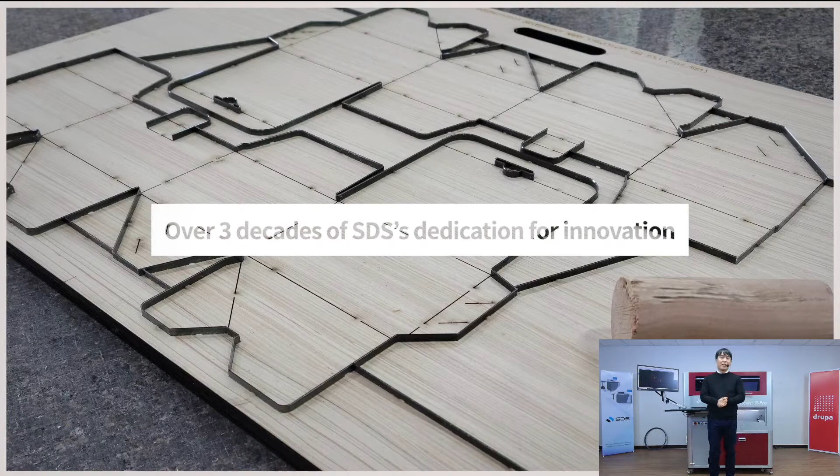SDS was founded in 1988 as a die shop and has since developed into a global company in the industry with numerous innovative products of fully automated processing and bending steel rule machines. Thousands of EasyBender and Channel Bender series sold in the US, Europe, and around the globe have proven that SDS is a leader and innovator since its foundation.

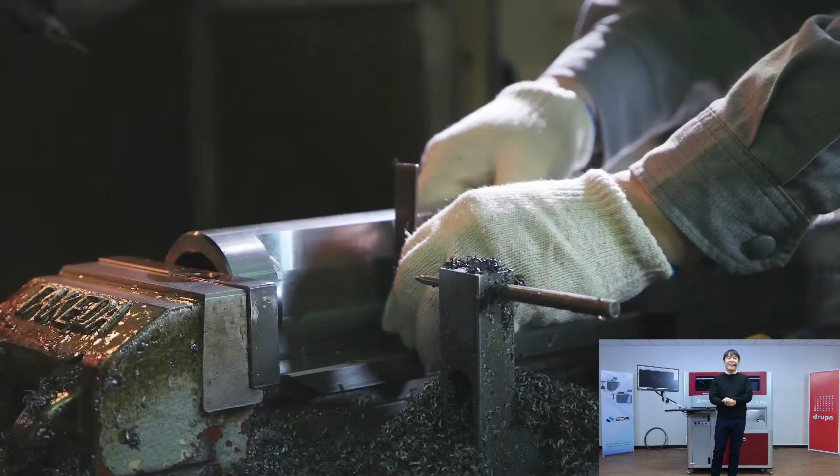A countless number of patented products and newly added in-house manufacturing capabilities, as well as distributors and dealers for sales and tech support all around the world, is just another way of promising to our current and future customers that SDS continues to strive for easier and better products.

Many of you out there might know that SDS made the first fully automatic curved steel rule bending machine in 2003, the EasyBender XR. We now call it EasyBender R, and have sold hundreds of them around the world. We initially believed that EasyBender R is enough for the market. Competition comes in, and we later realized that the market needs a reliable and affordable solution. So I am extremely excited to take this opportunity to introduce one of our latest EasyBender series, EasyBender R Pro, our answer to rotary die making.

EasyBender R Pro, what we have here, is capable of processing and bending 4-point notched and no notch curved rule up to 32 millimeters, from 257 all the way up to 695, the jumbo steel rule dies. One of the advantages of EasyBender R Pro over our competitors is that it is designed to change over different diameters of steel rules with a few clicks of the bending machine software.

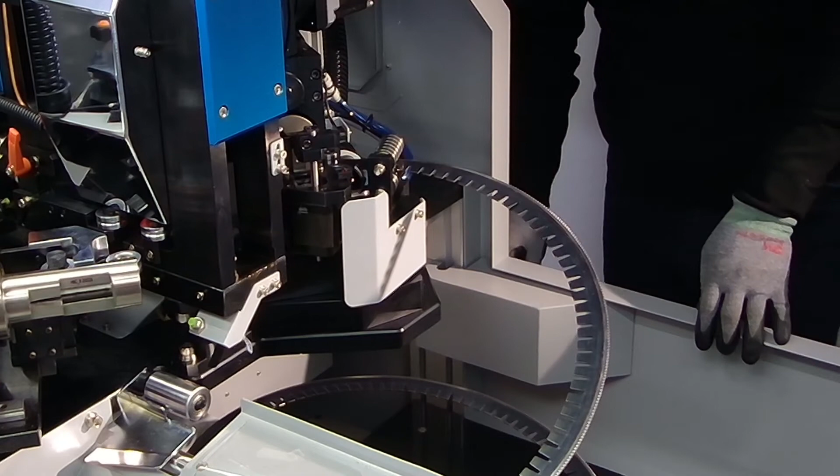So I will briefly illustrate how easy it is to change from 359, I think I have 359 rule, to 487 rule. And I'm going to demonstrate 487 notched and no notch rule. So here we go. I'm just gonna go get my gloves for safety reasons. And I'm gonna go and open this one and open the back doors. And I'm just gonna disengage this and just briefly show you what I have in here. This is the 359 rule, and I will just put it back in here again.

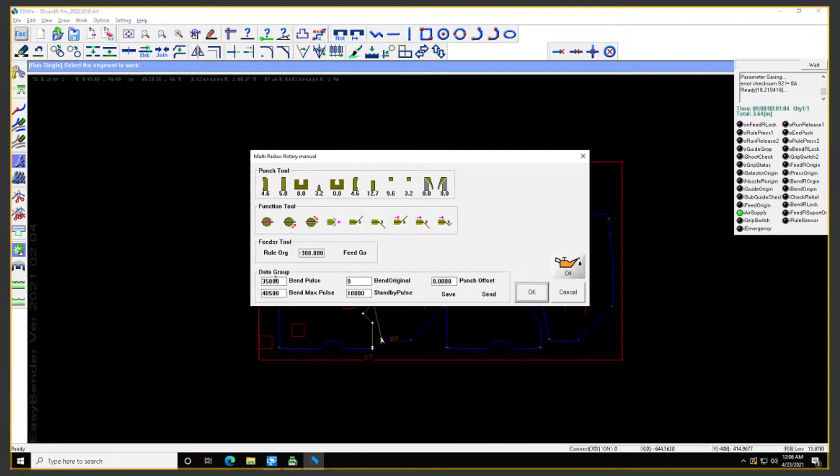And I'm just gonna go here, make sure the setting is in 359, and I will just go to manual mode operation and feed the rule to the home position. And I'm just gonna run a slot here. And this is the slot that I'm just gonna demonstrate for now. So while the machine's actually operating, this is the feeding unit here, and this actually has the feeders and rule suppressors here, and it actually rotates depending on the rule diameter. And this is the cutting unit here.

The cutting unit has our tooling with 5 tool positions in there, and this, as you can see, is the bending unit. And we'll just go over this bending unit later, when I'm actually running a different diameter of rule. And this is the slot that I just made here, and so it's ready to go into the die board.

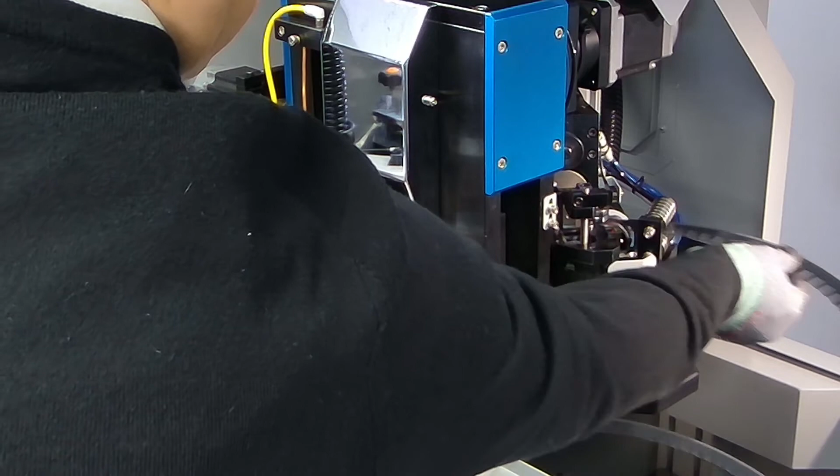And like I said, I will just go ahead and change over to a different diameter, and I think I'm gonna go to 487. So what I'm gonna do, since I can make this really quick, I can actually take the rule out from here and then go back to the software and go to configuration here. And I think tool name A is set up for 487 notched rule.

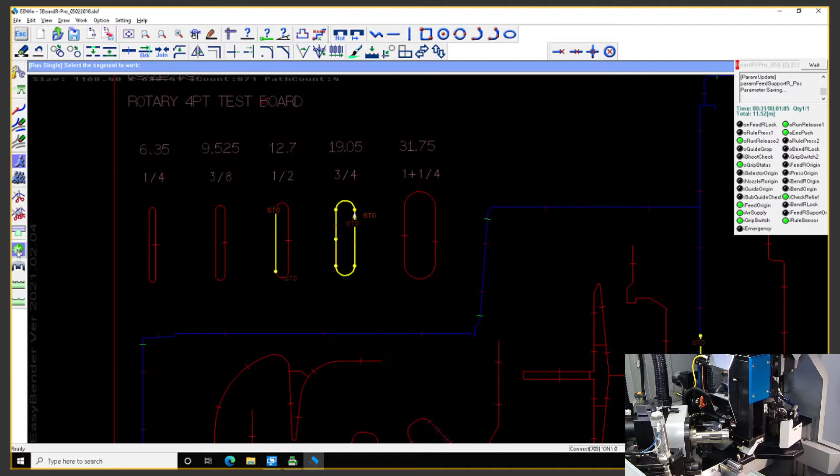So I'm just gonna go there, hit apply, hit OK, and then I will just go to manual mode operation. This window will actually let you change the diameter of the feeding unit here and bending unit there. And I'm just gonna go ahead and click this icon. It'll actually change over to 487 notch rule settings.

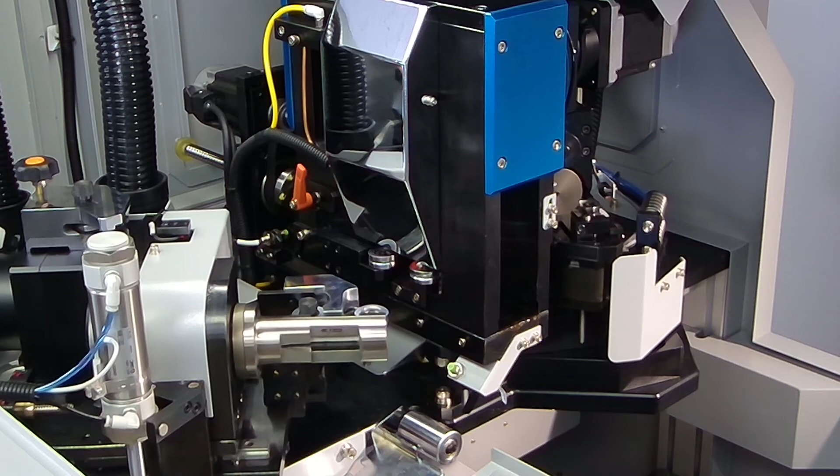And so while it's changing it over, I'm just gonna go to the back of the machine and then put the rule back in there. But I just wanted to point out just one unit here. This is just an additional rule guide that we use for 487, or rule diameters bigger than 487. And I'm just gonna put this one in here so that it actually guides those bigger rules into the bending unit the way it should be. So that's the purpose of that guide unit.

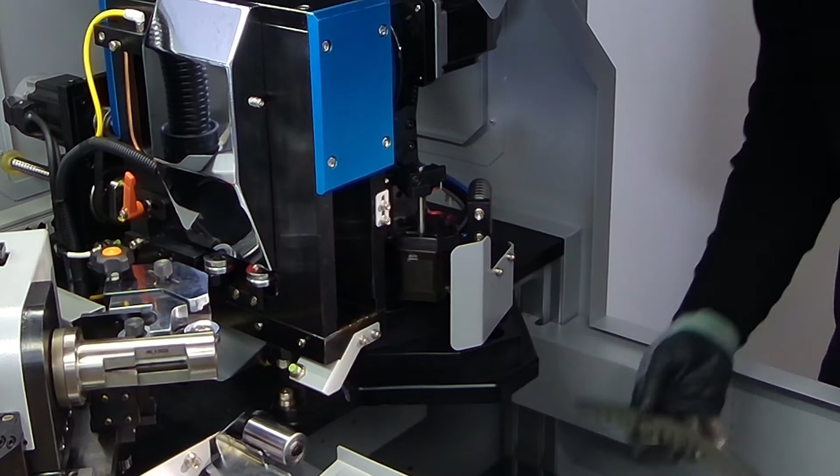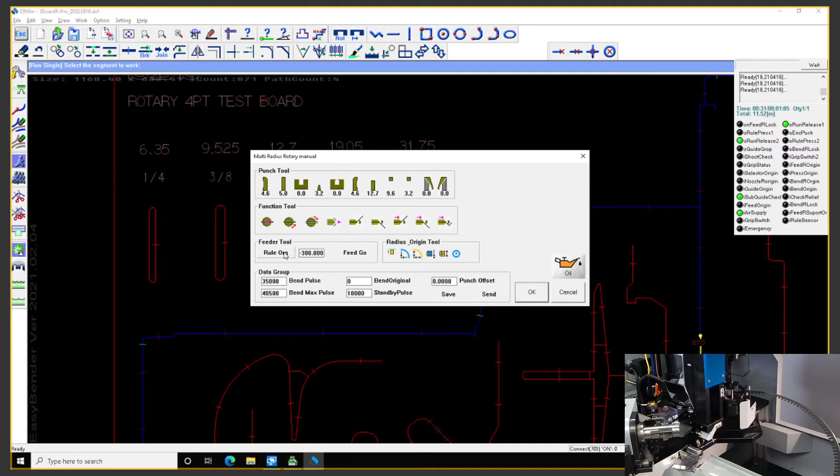So I'm back here again. Take this rule out and put this 487 notched rule back into the machine. And all you have to do, it's got some rollers here, through the guide rollers, through the tooling and the bending nozzle unit here. Right. And then when this is ready, I'm just gonna go ahead and click rule origin. It'll go to the home position there and hit OK.

And this is how easy it is to change over from 359 to 487. I mean, you could basically do that with 254 to 359, or whatever the rule diameter that you have, or even 487 to 695. And so you'll be able to use, once again, notched rule and no notched rule. And so, once again, this is how easy it is to change over from rule to rule.

And so I wanna take this opportunity to show you some other functions of our machine. The EasyBender R, our previous model, the first rotary steel rule bending machine in the world, has been a workhorse for many rotary die makers in the world, and does fantastic jobs on making slots. Those slots are something die makers don't want to do with their manual benders. With our EasyBender R, they were so happy that the machine just bends it the way it should be, and they don't really have to do any further manual bends and things like that. So they were so happy.

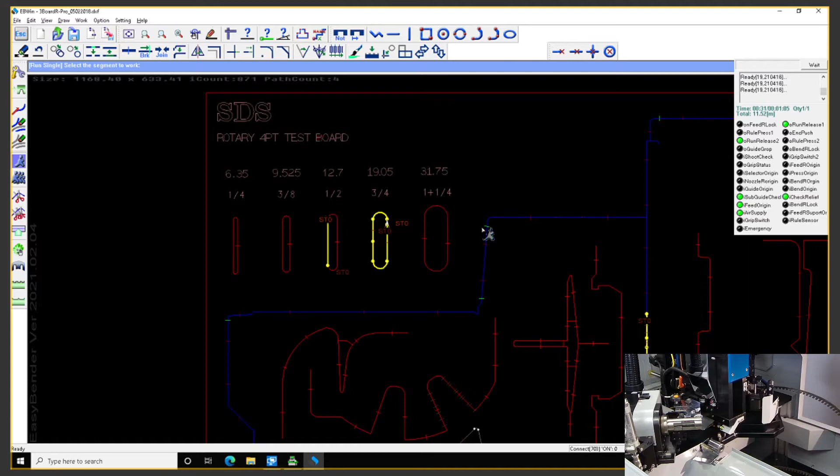So these slots and pieces with radius that are completed from EasyBender R are so fast and so accurate, and SDS engineers applied this same functionality to our new model EasyBender R Pro. So I will demonstrate by bending a couple of sample pieces of slot and a tab piece, maybe with the no notch rule, along with the built-in function called rotary arc post. Here we go. I'm just gonna make the slot with this existing 487 notched rule. I'm just gonna bend this same piece again.

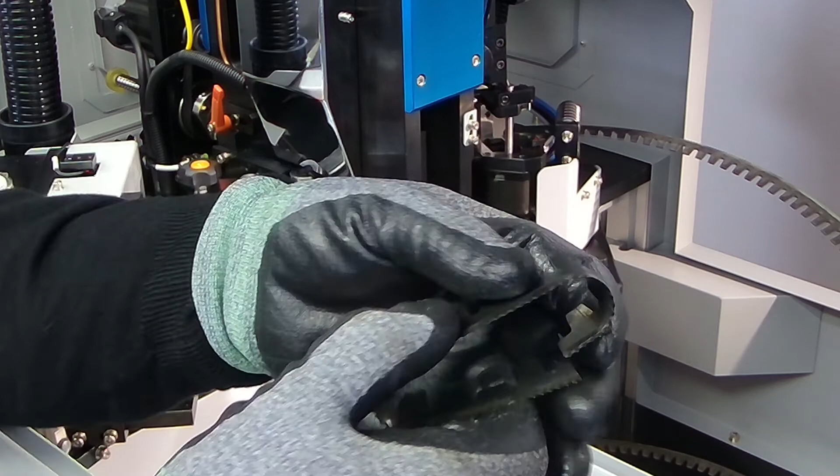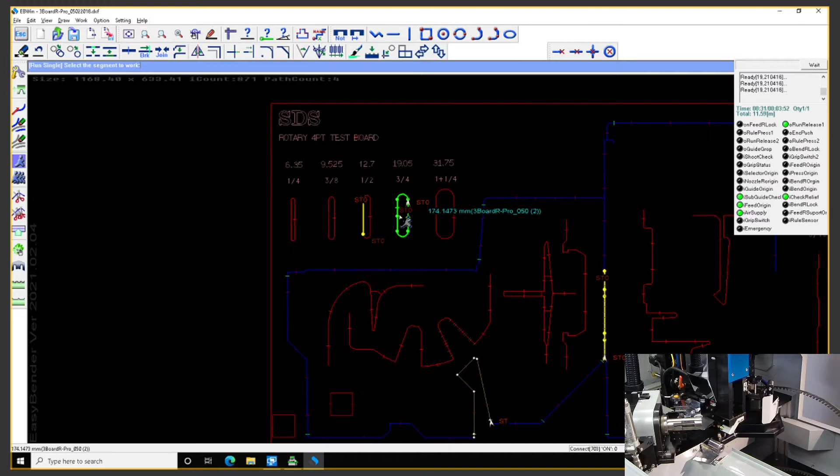And now I'm just gonna change over to no notch rule again, and then show you some tabs with the 45-degree bending angles with the relief bottom of the bending point. I can also put relief notches depending on the setting, and I will go over that function.

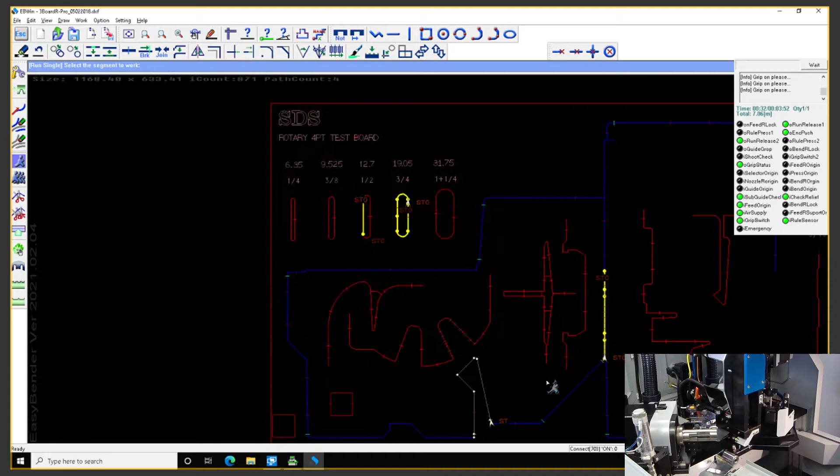So just like before, I'm just gonna disengage the rule, take the rule out from here and change to the no notch rule setting, which is B here, and gonna hit apply, hit OK, and go to manual mode operation and click that change over location icon again, and it'll reposition it for 487 no notch rules. So while the machine is changing its diameters, I'm gonna go back to the machine and take the notched rule out, and put this no notch rule here and put it back into the machine.

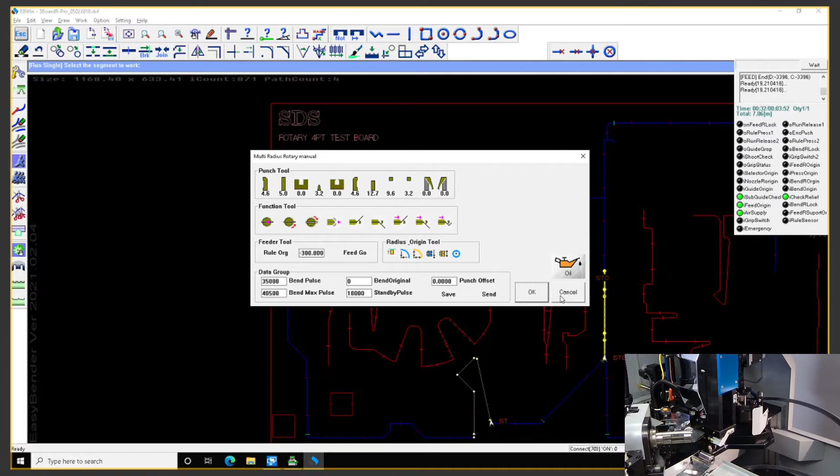All the way out. Turn the coiling switch back on. Okay, yeah, they are good. They are all good. And I'm just gonna go ahead and click feed origin, and the machine is ready for no notch rule now. So now, like I said, I'm just gonna go pick this tab here, and I'm gonna go ahead and pick the starting point and end point, and run this piece here.

So as you can see, our machine is designed to run notched and no notch rule, and if we are using no notch rule, the machine is actually designed to put the notch section on the no notch rule sections, depending on how you set the machine up here. As you can see, all these bending points here, for the flexible bending and better bending, the machine has a function to put a notching section on the bottom of the bending pieces here.

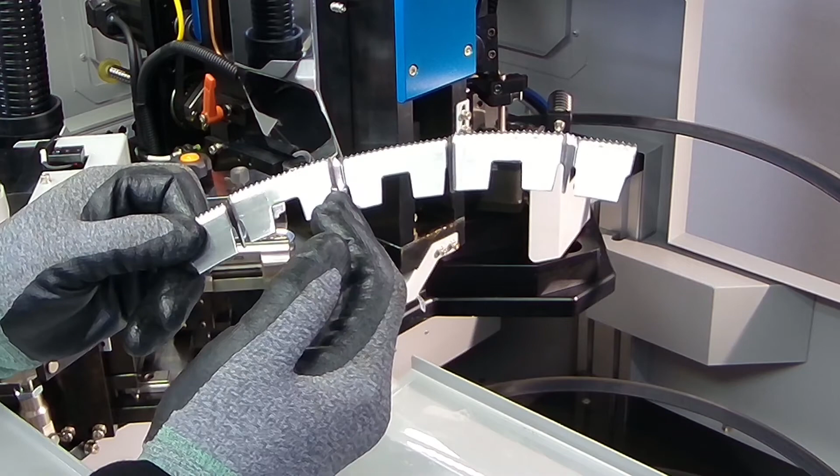This will actually help die makers drive these tab pieces into the die board without damaging the die board. So this is one of the convenient functions that you could enable or disable by just clicking on one software function here, right here on the second page, which is this rotary angle notch here. So everything that is greater than 45, it will start putting those notches on those sharp bending angles.

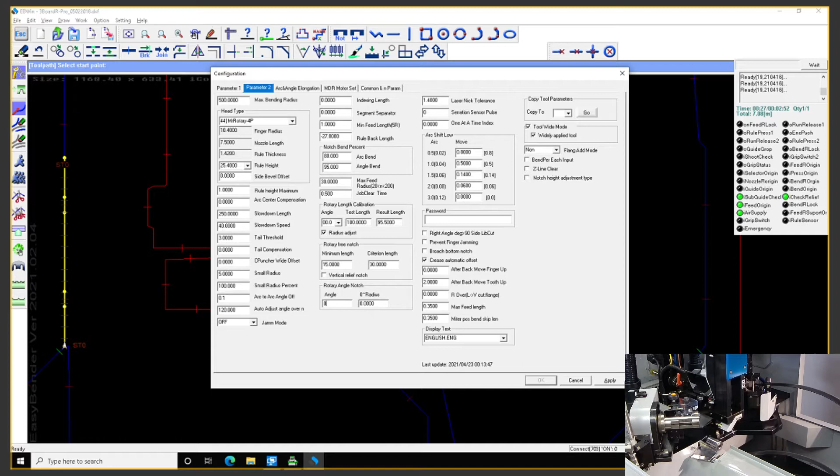If you just type in 0 here, which means I don't want to put any extra notches on the sharp bending angles, then what the machine is gonna do here, as you can see, I'm just gonna run this piece here, and it won't put any notches on that sharp bending angle section. So here we go again. See, you already see less number of cutting actions going on there. There's no

Okay. All right. So I think we have slight technical difficulties with the cameras here, but I just made a piece here, and this is the piece that I just made without the extra notches on these angles right here. So you could always enable and disable those functions with just a click of a button.

Right, so this is one of the functions that I wanted to highlight, and I also wanted to go over, since I didn't really go over these tooling sections, so I will go ahead and show you this tooling block that I have here, and I will actually demonstrate how to make perforation rule using our R Pro. So I'm gonna go ahead and grab this tooling here. This is the standard tooling module that comes supplied with the R Pro.

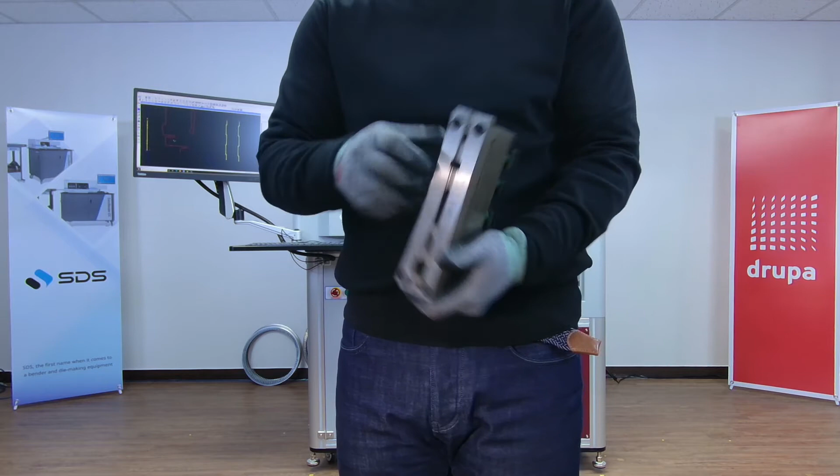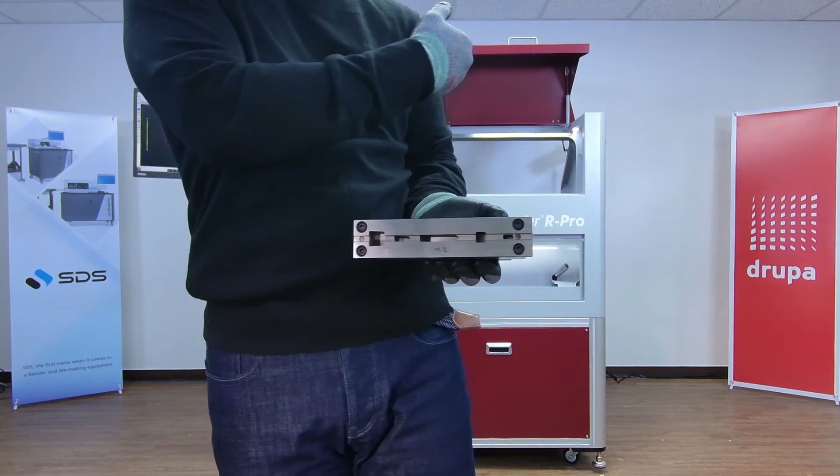We actually supply two of the same identical toolings, and out of this tool you'll be able to pretty much make all the custom perforation as well as just standard pieces that you drive into your die board, and it'll do notches, it'll do relief notches, it'll do top cuts, so that later on pieces coming out of the bending unit cut off, and then we have a full size straight cut and full size miter here, start and end, and then we have two custom perforation tools here.

So once again, out of this tool you'll be able to make pretty much all the custom tools that you want, and this tool also can be customized, you could add special tools like e-bolt gate holes or punching holes. A lot of customers these days make those e-bolt holes or custom punches, so don't forget, you could also make those custom punches out of this tool.

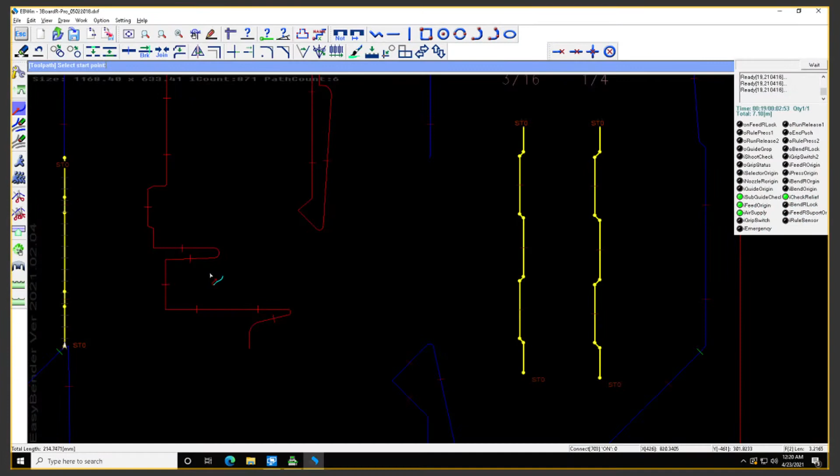So now I will go back there, and you could actually come in, okay, and I will go ahead and make this perforation rule here. I'm about to make a perforation rule here, but before I do that, I just wanted to point out how you could actually program these perforation rules. And you could actually do it two different ways.

You could ask your CAD guys to make these cross lines on top of any CAD lines that you want to make perforation rule out of. These cross lines indicate the cut and crease part of these perforation sections. So this can be easily done by your CAD guys using CAD software like Impact or Simpack or whatever CAD software you use. And as soon as those files are imported into our EBWin software, it will recognize those crossover lines as a perforation or cut crease.

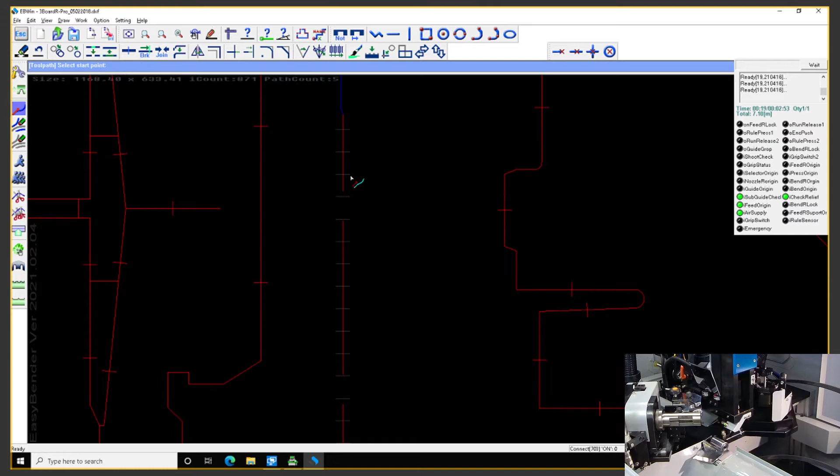So once it is done, all you have to do is go ahead and create the tool path, just like what you've been doing with our software. And then all you need to do is designate the height of the crease by typing numbers in here, which is the perf section. You could type in 20 or 21 or whatever size of crease you want to make. I'm just gonna type in 21 for now, and then I will go ahead and run a piece, and here we go.

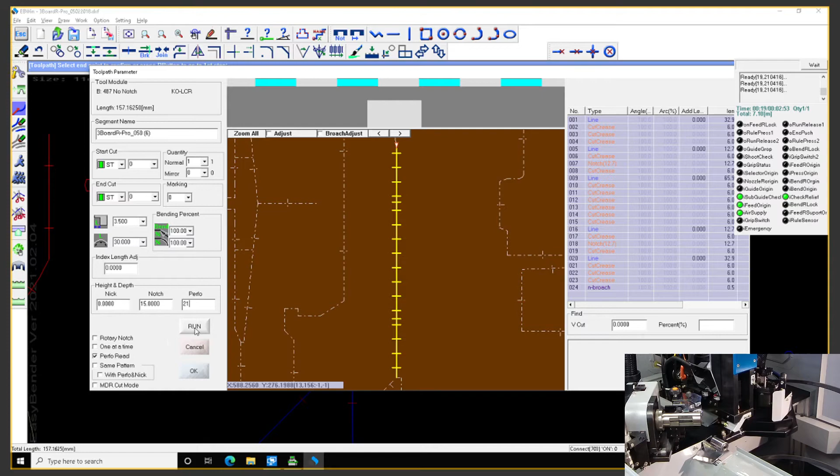So another thing that I wanted to point out is that you could actually make custom perforation out of notched rule and no notch rule. As of now, we are making a perforation out of a no notch rule, but then again, you could do this with notched rule here, and see how clean this piece is. And so this is what you could do out of R Pro, making all different sizes of custom perforation.

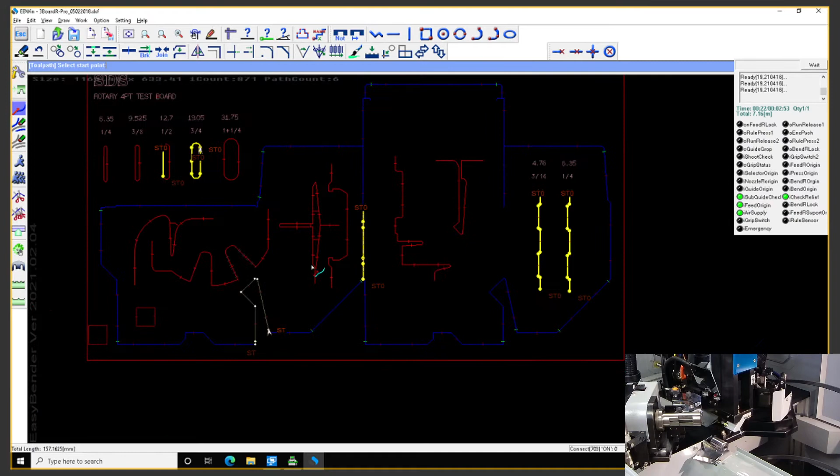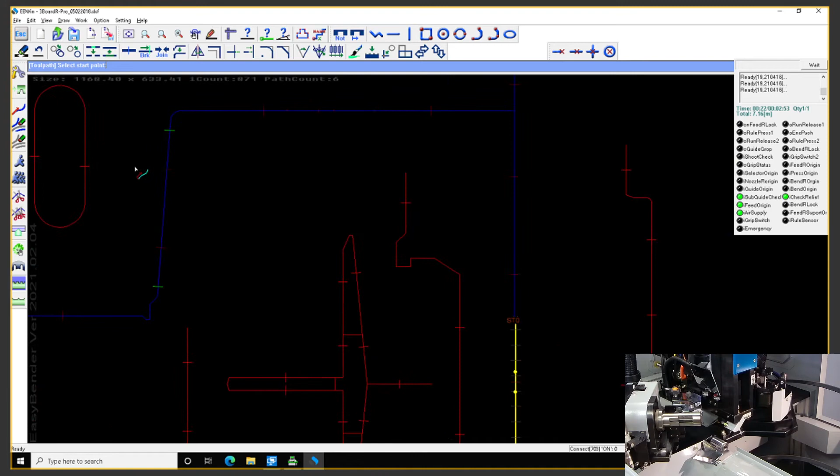So I'm just gonna pick this short section here. I think I'm gonna do this line right there. I'm gonna make sure that this is the nicks here. It says nicks, so I'm gonna go ahead and use this one. So all you have to do is click this and create the pattern first. And just like creating a toolpath, you click start point and end point, and then with this user-friendly graphical interface, you could designate the size of cut, the size of the crease, as well as the height of the crease.

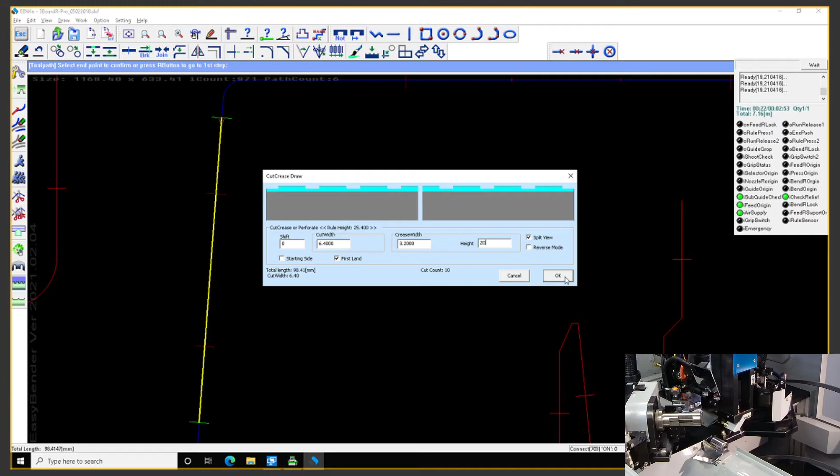And so now, since we made a few different sizes, I'm just gonna make 1/8 by 1/8. Pretty common perforation with slightly lower height, like 20 millimeters. And then I'm just gonna go ahead and click OK. So as you can see, I just created a pattern here by using our software. This is once again another way to create perforation.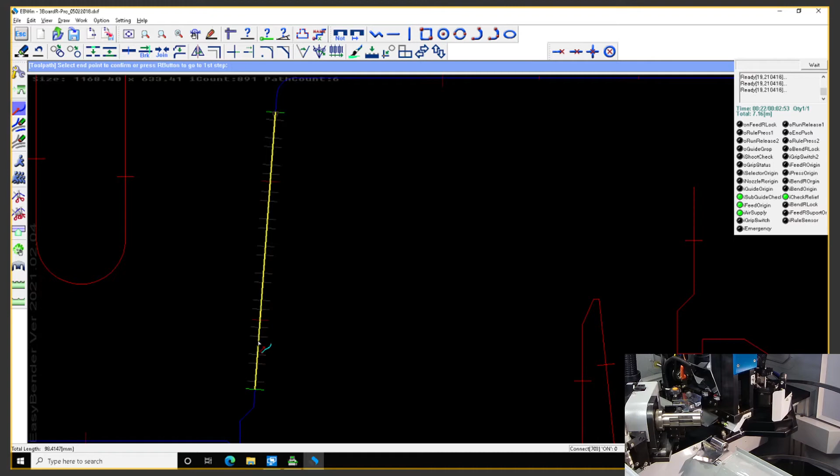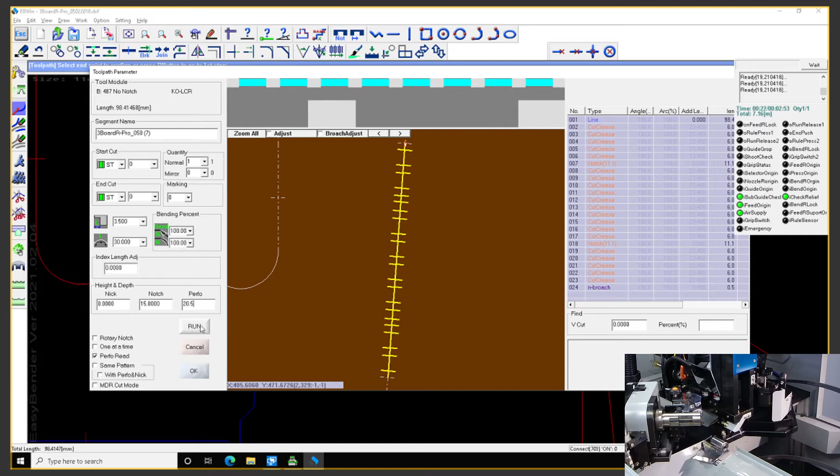And then I will go ahead and click toolpath here, create a starting point, and create another segment by clicking starting point and end point. And as you can see, this is what you're gonna end up getting. I'm just gonna go ahead and hit run. As you can see, the height that I typed in is here. So if you want, you could change it again here, like 20.5 or whatever, and then once you click this, it'll make those pieces.

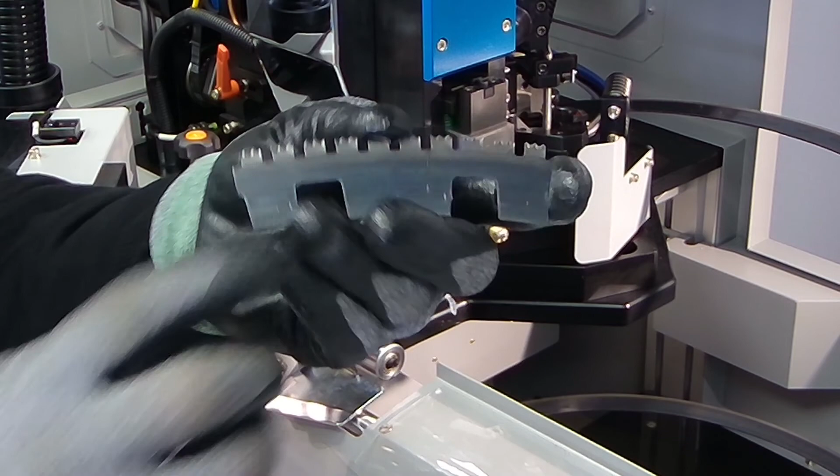So once again, you could make all this custom perforation with all different diameters of the rule, from 257 all the way up to jumbo dies like 695. All right, so this is it, and I think I didn't type in the proper number. I said I was gonna make 1/8 by 1/8, and I think I made 1/8 by quarter, but that's my bad. But this is it. You could actually make all different custom made perforation out of this.

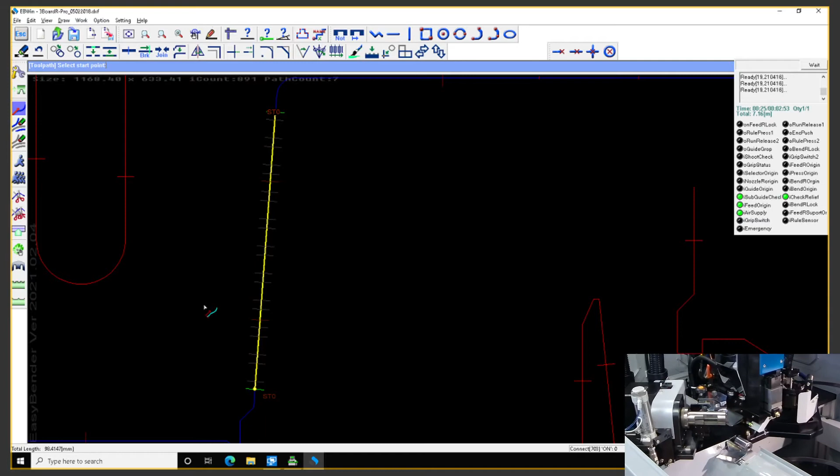So this is the second feature that I wanted to highlight, and I'm just gonna go over one last thing, which is the MDR Cut Mode. This is, I think, a fantastic feature built into our R Pro. As a matter of fact, a rotary die is comprised of many different shapes with different geometry, but it surely contains a lot of straight lines, like trim breakers with bent points at the end, or straight lines, and a lot of long side knives on the side or in the middle.

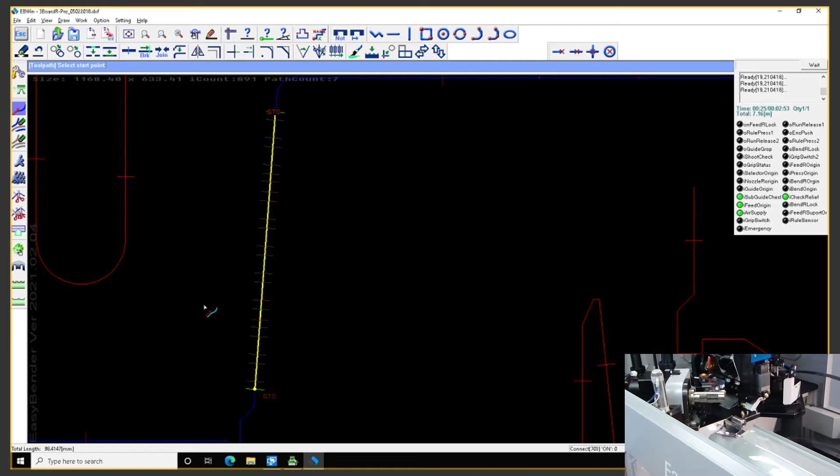There are so many different side knives there, and so software and mechanical engineers at SDS are fully aware of this situation and made this entire process of making these straight pieces faster by using a process called MDR Cut Mode. MDR Cut Mode is like using EasyBender R Pro as a rule processor without using the bending unit assembly. I will demonstrate now how convenient this process is by making one long side knife and 10 trim breakers.

So, the first step, I think I'm gonna make it with the existing no notch rule. I'm just gonna go ahead and open up multiple view windows so that I can actually open another file.

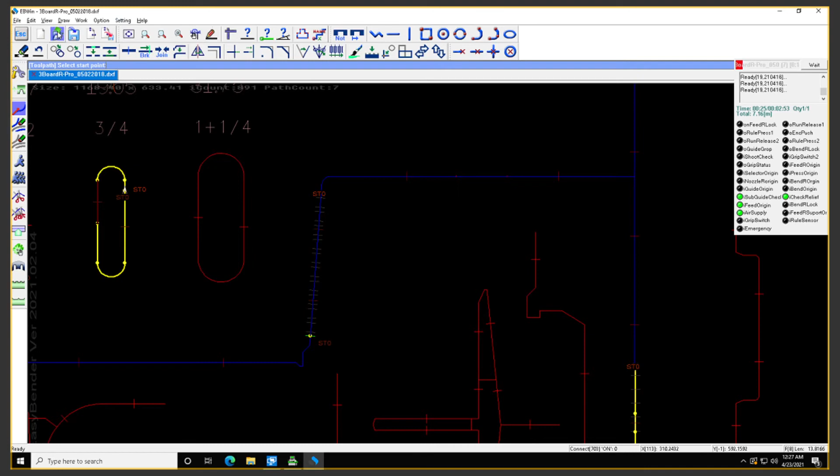And okay, this is it, and I'm gonna go ahead and open it up. I just double check the scale setting here. You could actually change it from inches in standard to metric and vice versa. So I just checked it, and I'm gonna go ahead and click this open.

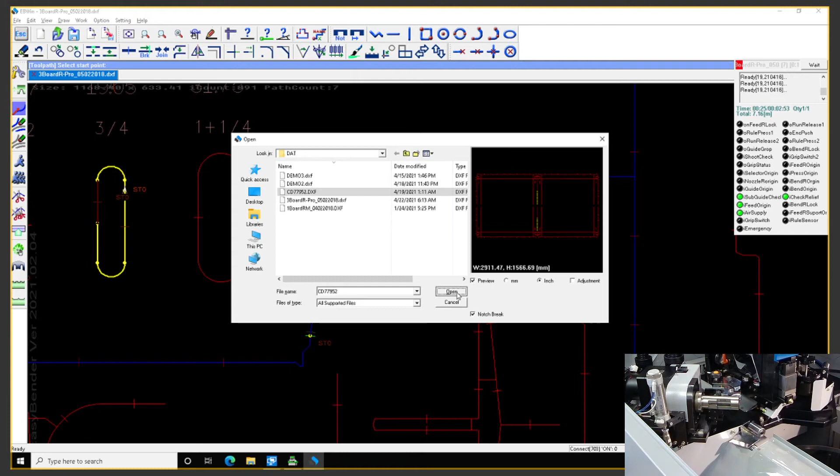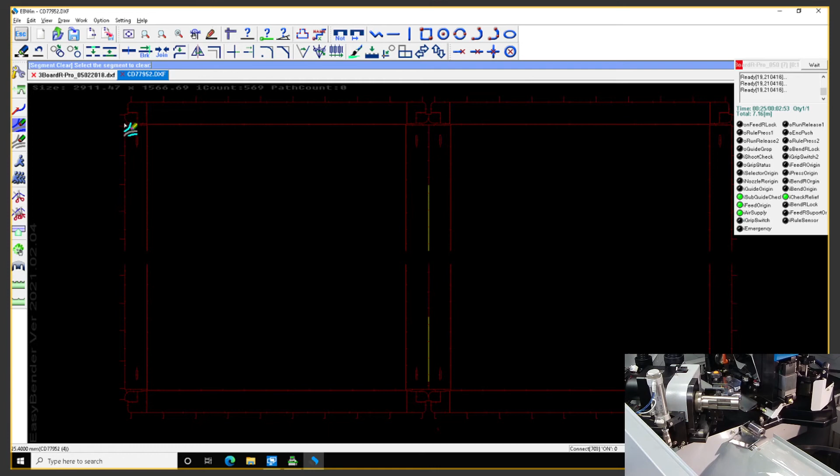So I just delete those things, and like I said, I'm just gonna go ahead and program this with MDR mode. So basically pieces will come out without using the bending unit. So I'm gonna go ahead and plot it, start with the miter piece and end with the straight piece.

And with this one, as a matter of fact, I need to check this MDR cut mode on so that the built-in sensor detects that mode with the bracket that I'm about to install. So, and everything seems to be okay.

And I'm just gonna go over one last thing, which is the same pattern detection mode. By enabling this, this will actually detect all the exact same pieces in this CAD file automatically, so that you don't have to count how many trim breaker pieces you have on this CAD file like you used to do in the past with previous versions of software.

But this time I'm not gonna run 64. I'm just gonna run 10. Like I said, we don't have time for making 64, even if machines are extremely fast. And I'm just gonna go ahead and hit OK, and then I'm gonna go ahead and start and end and do the exact same thing. And I'm gonna click and hit OK.

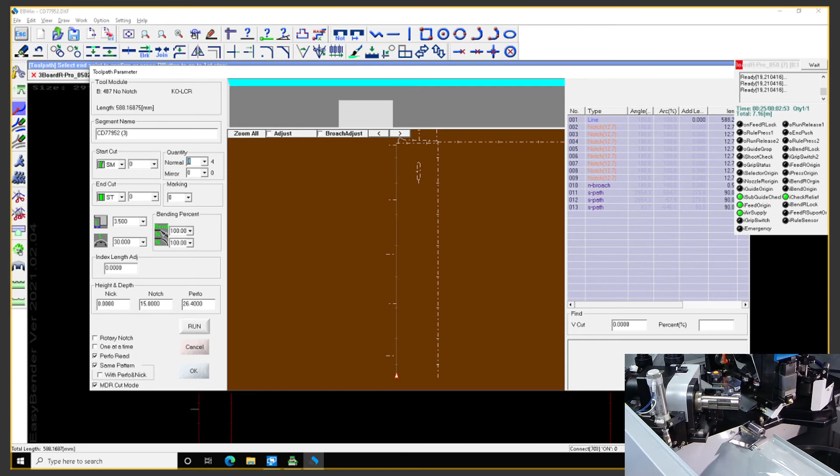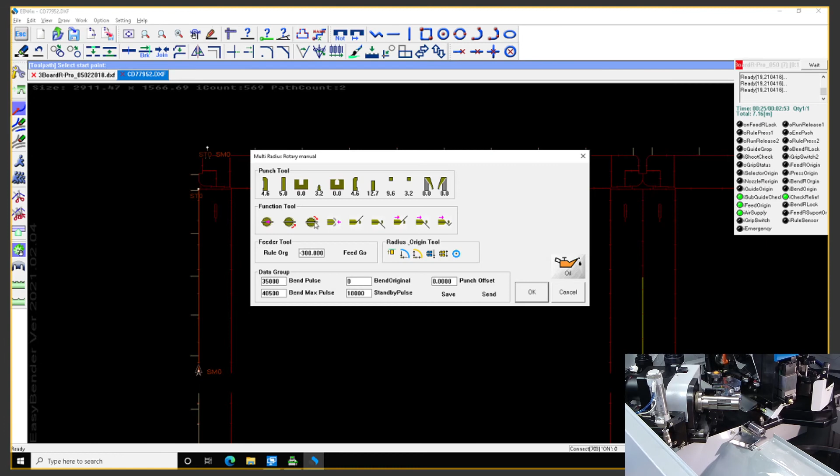I'm just gonna run one, and here I'm just gonna go ahead and change the setting now by moving this bending unit backwards so that I can put that additional bracket that I'm about to show you. And to do that, all you have to do is go to manual mode operation, and this bend all origin icon will move the entire bending unit backwards so that I can actually install this additional bracket. And here we go.

As you can see, the unit is backing off, and this bracket, all you have to do is put it into the spot here, lock it with the thumb screw, and it's done, it's ready. So I'm just gonna hit OK and go back to the

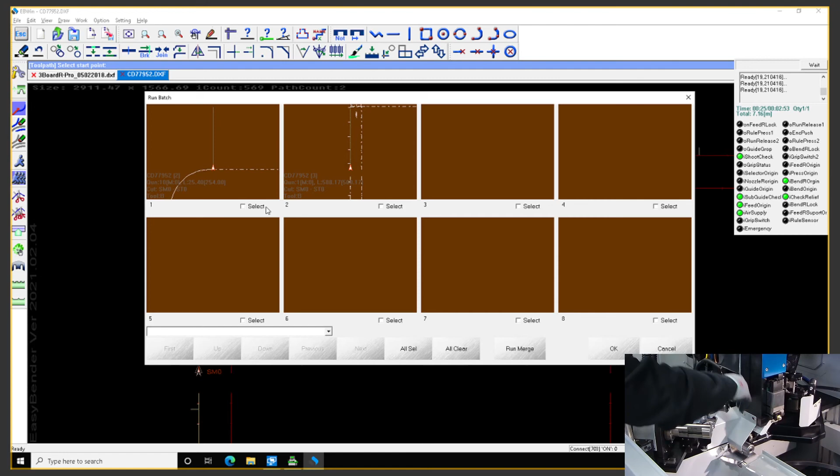segment pieces that I programmed, and this time I'm using the run batch window, and just gonna go ahead and run these two pieces by checking the select boxes here. So I'm gonna go ahead and run it now. Hit OK. It will make all those pieces, as you can see.

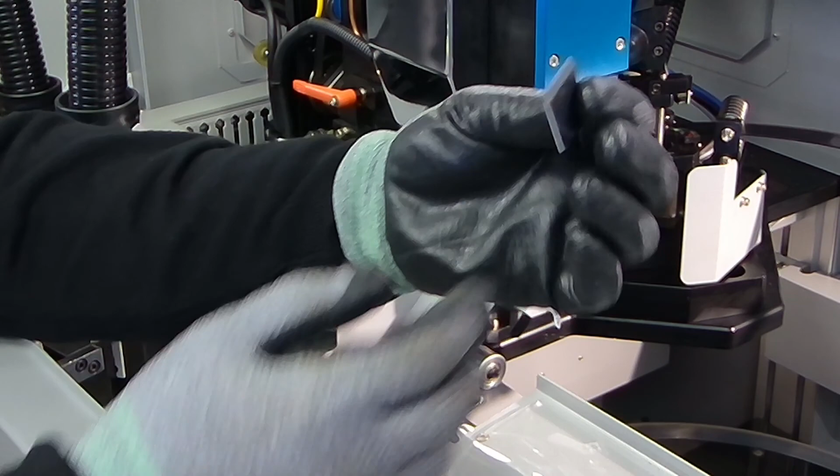So the 10 trim breakers are coming out. As you can see, it's got miter pieces here and straight pieces here, and very nice and clean. Once again, you could actually do this with notch rule or no notch rule, and the 10 trim breaker pieces are done. Now it's actually making the long side knives.

Okay, here we go. This is it. This is how convenient this is. Right? Yeah. Okay. Right, I think this should be enough. And so I think this is all for this session.